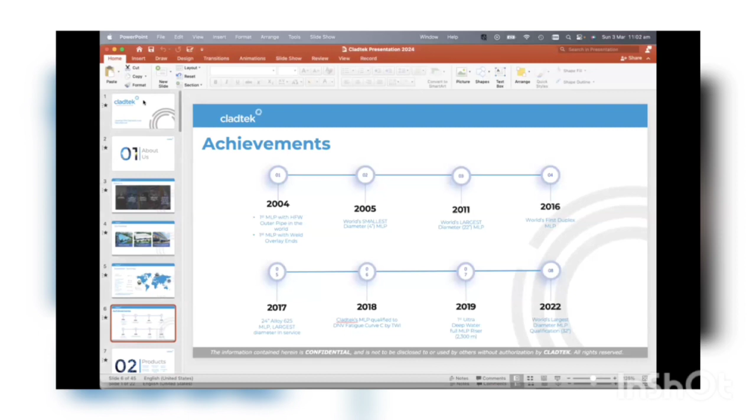Cladtek was founded in 2003. In fact, we've just had our 20th anniversary, so that's an important milestone for us. We were founded in Australia, as some of you can probably tell from my accent. I'm Australian, and our goal was to become a leader in mechanically lined pipes, so corrosion-resistant alloy pipelines, and overlaid products and all the complementary products that go around the pipeline: plets, plems, slug catchers, pig launchers, etc. All of those components that need to be in CRA.

We have 3 manufacturing facilities at the moment. Our original one in Batam, Indonesia, which produces MLP, bends, overlay and the like. Similar capability in Brazil, but the Brazil facility is more targeted at ultra deep water risers and flow lines, dynamic risers, lazy wave risers, and in Dammam, Saudi Arabia, which again is tailored to that local market. And we're in the process of establishing a facility in Doha, Qatar.

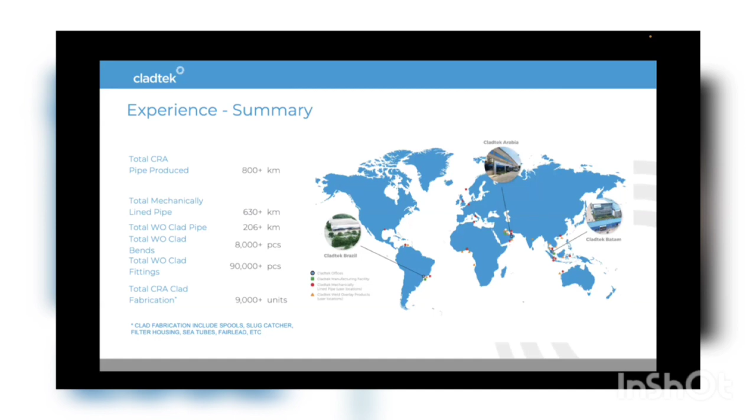Anyway, enough of the infomercial about Cladtek. So I will now jump to connected pipes.

This presentation, as I said, just gives an overview of the experiences with connectors and where the industry is at the moment, and a little bit about why there's renewed interest in connectors. So first of all, what are connectors and what is this presentation going to focus on? I think many of the people joining this webinar will be experienced with pipeline connectors.

There's all kinds of connectors. There's bolted connectors like a simple flange, Grayloc style connectors, and there's also push-fit or MIF connectors, which is another non-reversible way of connecting pipelines together, a kind of cold welding technology. This presentation is going to focus on connectors that are reversible, not the push-fit style, and connectors that don't rely on bolting.

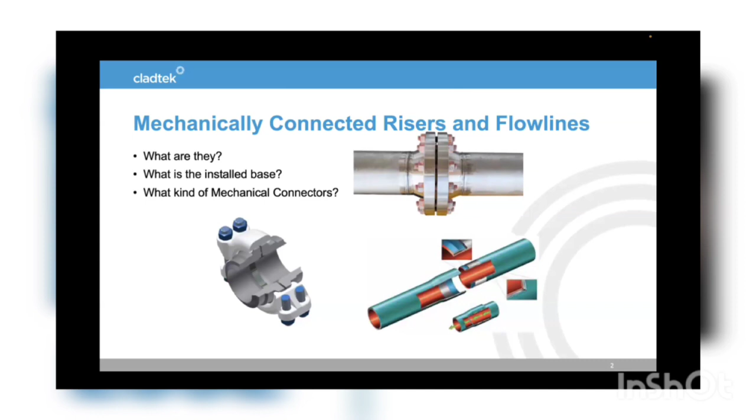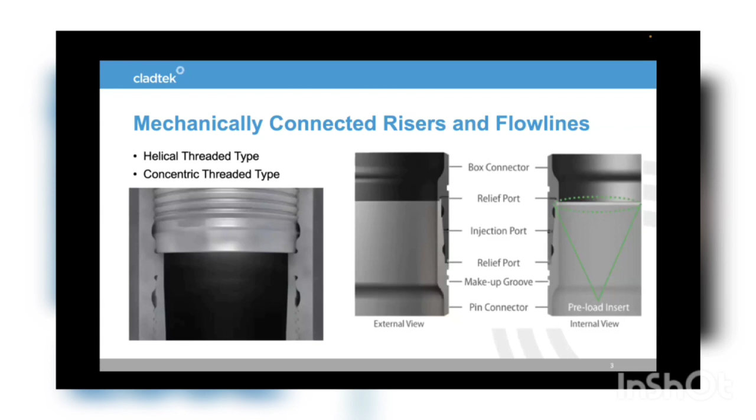The various types of connectors that exist: there's the helical thread type or the snap-together connectors like Merlin or the GMC connector. There's concentric thread type. There's helical thread types like you find in OCTG, and these can be adapted for risers and flowline use and have in fact been successfully used.

Why is there interest in mechanical connectors? Why is there renewed interest? We see there's a lot of interest in increasing use of CRA materials, and that is making the installation more challenging, with more technical requirements on the barge. So the idea of using connectors removes that complexity from the barge and takes it back to a workshop.

In ultra deep water, people have become comfortable with the use of flexible pipes, but in ultra deep water, flexible pipes are proving challenging—water depths beyond 2,000 meters and in larger diameters. But if your mindset is around flexible pipes, adapting back to a rigid solution is quite challenging in terms of the engineering and work required to install a rigid riser and flow line versus flexible.

Using connectors makes rigid pipe more like flexibles in terms of deployment. In other words, they're pre-engineered solutions, plug and play.

Another area of interest in deeper waters is higher strength materials—materials that are either difficult to weld, not possible to weld, or require post-weld heat treatment. Again, using connectors pushes this activity back into a workshop environment rather than on a vessel.

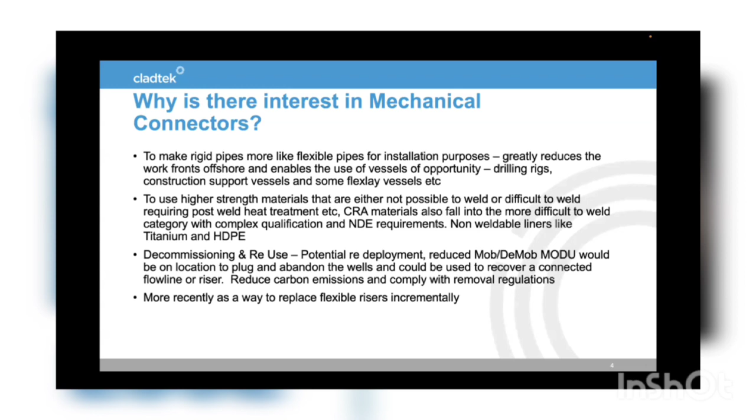So what are the concerns with connectors? Well, the main concern is failure, or the light bulbs in series argument—that if one connector fails, then the whole integrity of the pipeline or riser is brought into question. That's of course a valid concern, but there's a lot of data on connectors, and there's a lot of data to support that connectors are extremely reliable and up there with welding, if not better than welding in terms of reliability.

The other challenge is that connectors are generally not supported by the major EPCI companies, because they're welding people. They're not that much interested in developing and promoting a technology that makes every drilling rig and every construction support vessel something that can compete with their sophisticated deep water J-lay and reeling ships and the like.

And connectors tend to be proprietary, and that often interferes with the contracting models of various, particularly state-owned enterprises or state-linked enterprises like the likes of Petrobras, who find dealing with proprietary items as kind of a last resort solution. The other challenge is complex and lengthy qualification requirements.

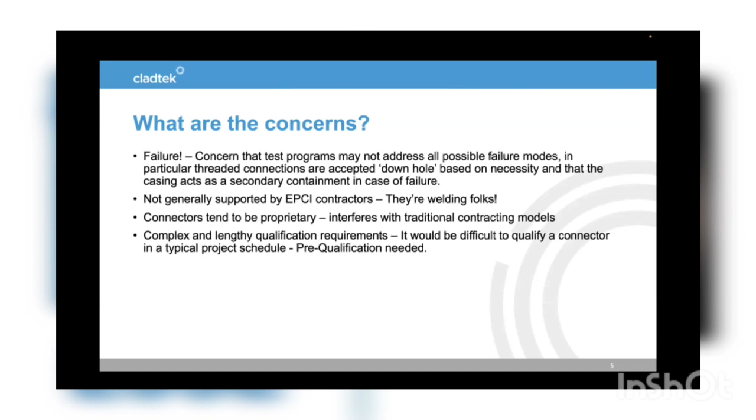Now, that of course means you've got to start the process, but the main benefit of connectors is you can pre-engineer and pre-qualify them for a range of service. So yes, it takes a while to get them qualified in the beginning, but once they are qualified, then it's a plug and play and a copy paste kind of engineering approach.

To be used in oil and gas services, what kind of characteristics do connectors need? Typically, we're looking for high pressure capacity and high reliability, resistance to leaking, able to cope with large bending loads—so that's the loads during installation, lateral buckling—and in the case of risers, a high fatigue capacity, internal and external corrosion resistance.

The internal resistance means the connector needs to be protected from the well fluids coming through the pipeline or riser, and externally, seawater ingress into the threaded areas or areas that mechanically lock together is also important for integrity. So they need internal and external corrosion resistance, and that's mainly achieved by coatings, water resistant seals—environmental seals—and anodes.

The easiest way to make people comfortable with connectors is to make sure the connector is stronger than the associated pipe in all load cases. So as long as you're sure the connector is stronger than the pipe, then the pipe is your limiting factor, and that's what you can go about designing.

The issue with that is stress intensification. The connector can be large and quite stiff, and that can create some intensification factors on the adjacent pipe, but that's not black magic—it's easily an engineering analysis that can be carried out.

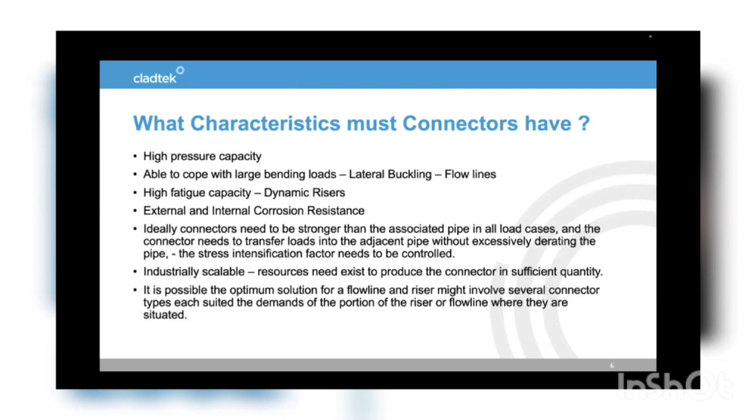It's not necessarily that connectors will be one size fits all, but of course the fewer connectors you have to qualify, the better. We think the rapid pipe connector is one that can handle pretty much every application required for flow lines and pipes, at least up to about 20 inches.

So looking at what kinds of connectors have been developed and deployed, the first one I could find that was specifically developed for flow lines or risers is the FMC differential thread connector.

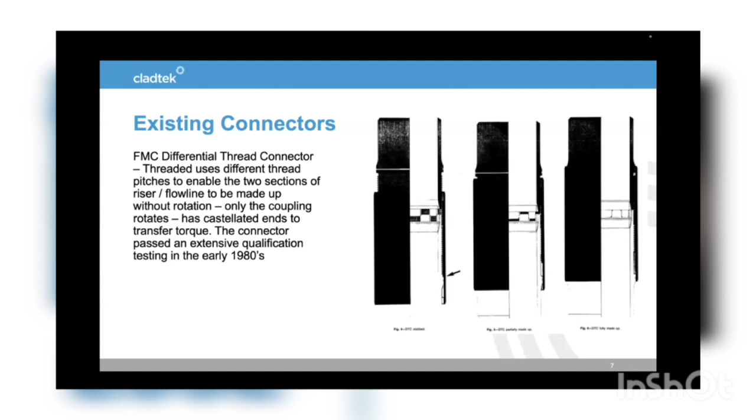This connector works by having two different thread pitches, so as the coupling is made up or the connector screws together, it pulls together one side quicker than the other. As you rotate the coupling, progressing from left to right in that schematic from the early 80s, you can see the castellations come together and the connector locks up. This connector was used by FMC, but they don't promote it anymore.

Then Hydril had a connector called the Series 2000, which has been deployed and is still in service on the Magnolia TLP in the export risers. I'd say this is an improvement or adaptation of the FMC connector.

Instead of using a differential thread, it uses a left and right hand thread, so the coupling rotates rather than the pipe. You can hold the pipe either in tensioners or slips, and then make up simply by turning the coupling rather than having to spin the pipe, and that brings it together.

In this area, you have some castellations - shapes machined into the end of each pipe. The idea of these features is that when the connector is locked together, external torque cannot undo the connection. So if the pipe were to upheaval buckle and lay over on the sea floor, that torque would not be able to undo this connector. That's obviously a concern people have with connectors.

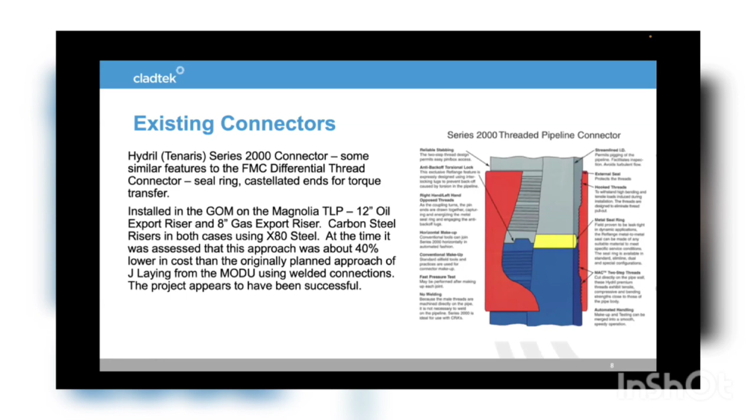Also among existing connectors is the Merlin, or GMC connector, which is a snap-together type connector. It works by having concentric rings that look like threads but don't actually screw together. It pushes together with hydraulic pressure injected into injection ports, which creates an elastic deformation of the pin and box, and then it's pushed together and those things snap back into place.

This connector was originally developed for structural applications, to connect together the legs of TLP platforms - the tendons for tension leg platforms. These days it is being adapted for fluid transport as well, and it has established a market in replacement risers, such as seawater risers on old platforms.

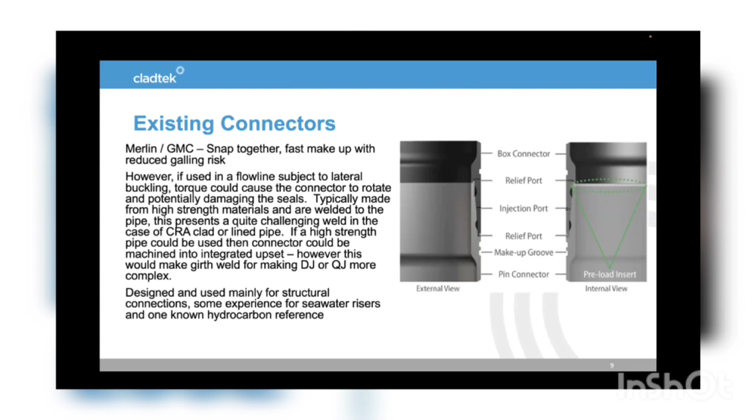The attraction of using this kind of connector in that application is that there is no hot work on the platform when it's replaced. Now this connector is being promoted also for hydrocarbon service, and as far as I know, it has one installed reference in that service.

The other kinds of connectors you'd be quite familiar with are adaptations of OCTG style connectors. So VAM TTR, which is a threaded and coupled connector, is an adaptation of something like VAM Top or VAM HC. There are a number of other OCTG thread technology companies promoting traditional threaded type connectors also for riser and flow line use.

The concern with these kinds of connectors is the possibility of them unscrewing under external torque, and that they're not really optimized for the purposes of flow lines or risers. They are as they seem - an adaptation of something designed for downhole use.

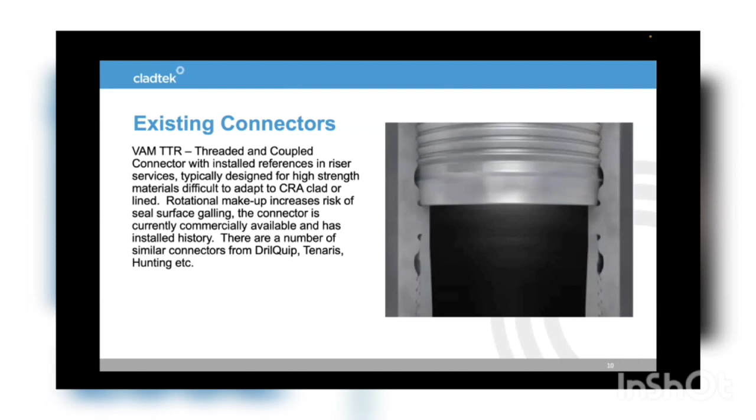So our connector, which we will go into more detail on, is the rapid pipe connector. The best way to think about it is as a BX flange or BX swivel flange, where we have removed the hub and bolt section and replaced it with a tensioned collar. But the sealing arrangement and sealing technology is the same as a BX flange. The makeup system, which we will show in more detail in the following presentation, is a tool that grabs the pipe and connector, pre-tensions that collar, and then you screw in the toothed ferrule.

The pre-tensioning technique is something similar to how you would do a Hydratight bolt tensioning activity. That's where you stretch the stud bolt and the nuts are turned without load, and then you release the stretch on the bolt and everything is made up. This works the same way: the collar is preloaded and the toothed ferrule is driven into place without load and locked up, then the hydraulic tool lets go of the collar, and we have a device that measures the residual tension in the collar.

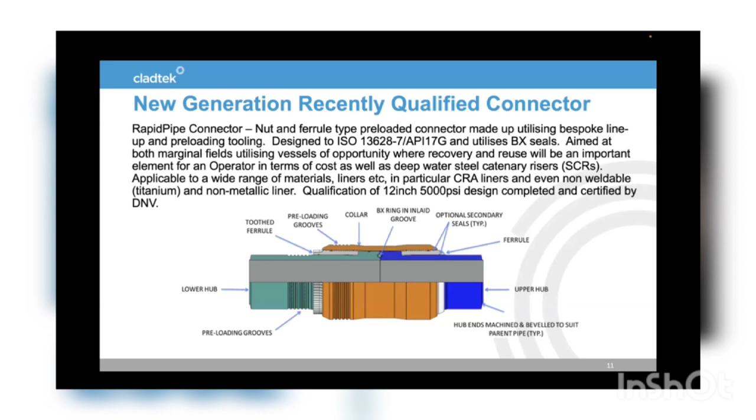So if we compare the different connectors here, and we can share this presentation after. So it seemed to have a bit of background noise there. Apologies.

This matrix compares the various different connectors, and we have tried to address the various limitations of the existing connectors. The differential thread is really not supported anymore. The Series 2000, as far as we know, Tenaris is not making it. So the ones being promoted in the market these days are the Merlin GMC, the various threaded connectors, and Rapid Pipe. We think that Rapid Pipe addresses most of the issues that you find with the other kind of connectors.

One of the big challenges of the snap together connector is they're made of very high strength material. So you replace one complicated weld with two welds that are more complicated. The sealing area is part of the structural integrity of the connector, which is also a challenge. Rapid Pipe overcomes most of these.

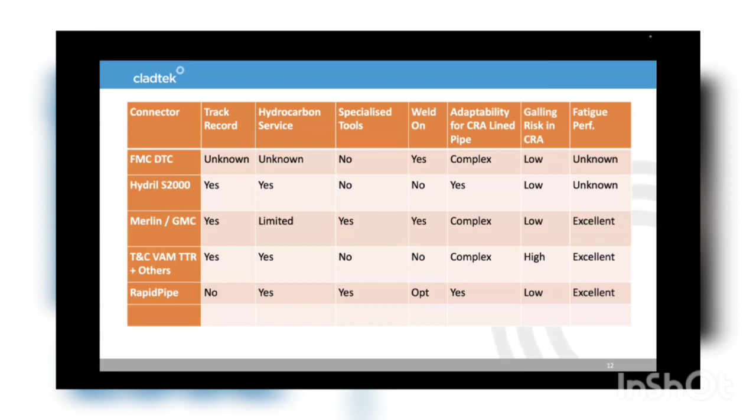In terms of developing what the industry needs to adapt these connectors for use with non-weldable liners, we think CRA liners is very important, and that work is ongoing at the moment. More engineering analysis is needed, and a suite of software tools to define how to install connected pipes, what vessels to use, and the parameters for different vessels.

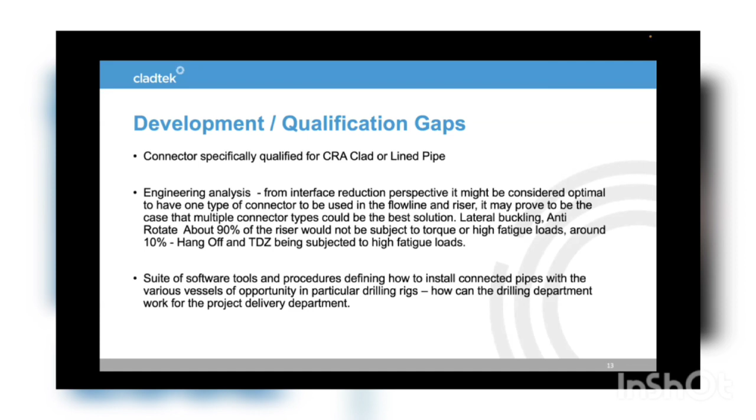With a drilling rig, on an older rig you would be able to do a double joint. On a more modern rig, maybe a triple joint. On construction support vessels, quad joints are possible, or if you're going to install using a conventional J-lay or S-lay vessel, in most cases quad joints should be possible. So all of this needs to be developed and worked out.

If we look back, there's been lots and lots of presentations on connected pipes, and I'd say there's been more studies than there has been risers installed, but there has been quite a few connected flow lines and risers installed over the years, and for the most part they have been successful. But nonetheless, welding still remains the major technical solution for connecting pipes.

Why is that? This is a statement made 20-something years ago at a presentation: threaded couplings have been used for many years in the offshore industry, particularly in drilling applications, risers, and BOPs, and people are super comfortable with connectors in that application. But as soon as you get to the pipeline or the riser, there seems to be significant resistance.

I mentioned some of the reasons for that before, namely the industry resistance in terms of it being against the industry's vested interest in keeping people welding, because all of the installation assets that the main EPCs have are geared around welding. And the industry has relatively high confidence in welded connections, and the availability of traditional installation vessels all work around welding.

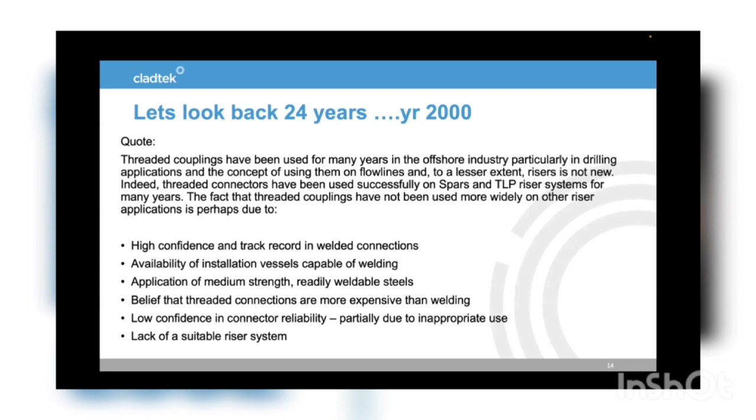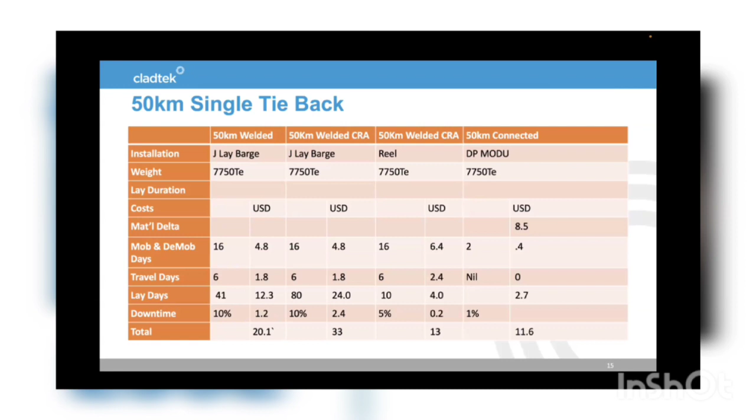If we compare to a shorter tieback, the difference is really quite stark, using a drilling rig for the installation because the rig is already on site. So your mob and demob is almost nothing, just a little bit of equipment that needs to go out to the rig to facilitate the installation. And your material delta, again on a short tieback, is relatively small. But you can see the cost is roughly 75% less than mobilizing and doing it using any of the conventional techniques.

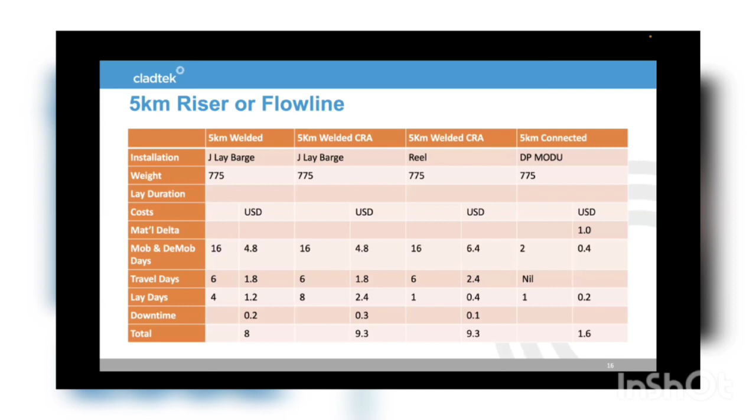So this is just to say where the industry is up to at the moment. Connectors for pipelines do exist. They are qualified and already in limited use. There's still further development needed to address specific sectors of the market, CRA in particular, and other non-weldable liners. But we are seeing increasing interest from operators, particularly those in ultra deep water, to look at connected solutions.

Petrobras is one that is running, looking very closely at a connected solution. We know other super majors that are looking at conceptual development for 4,000 meter water depth, because the deepest water depth drilled now is, I think, just over 3,600 meters.

And of course, if you find something there, you need to figure out how to produce it. These operators that are drilling at these depths have engaged in studies looking at how they would go about developing discoveries in water depths up to 4,000 meters. And those conceptual ideas all consider a connected solution which enables the use of high strength materials.

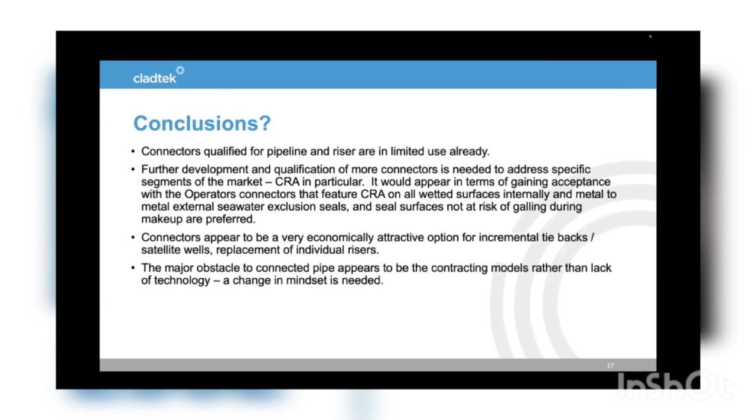Connectors appear to be a very economic, attractive option for tiebacks, and very attractive where CRA materials are involved. The major obstacle I can see is mainly inertia, the contracting models. It's not a lack of technology, it's contractual inertia and a mindset.

Looking towards the future, why is it different now, and why after 20 years, if there's only been such limited adoption, do we think there will be more acceptance and more drive to using connected solutions?

One reason is an explosion in demand for CRA pipes, driven by ultra deep water, high temperature, high pressure discoveries, and also by re-injecting CO2. To give Brazil as an example, in the WAG injection lines, the CO2 is going back into the wells, and that creates quite a corrosive environment. So we're seeing more and more CRA, hundreds of kilometers a year rather than 100 kilometers every few years.

And we know that the welding productivity of CRA is quite poor, which is why reeling is an attractive option. But we need other options that are attractive as well, commercial and proven. We expect in the future, as the transition to lower carbon solutions takes place, there will be more emphasis on tiebacks and using existing infrastructure as much as possible. And again, tiebacks tend to be CRA because they're blood, guts, and feathers back to the processing facilities.

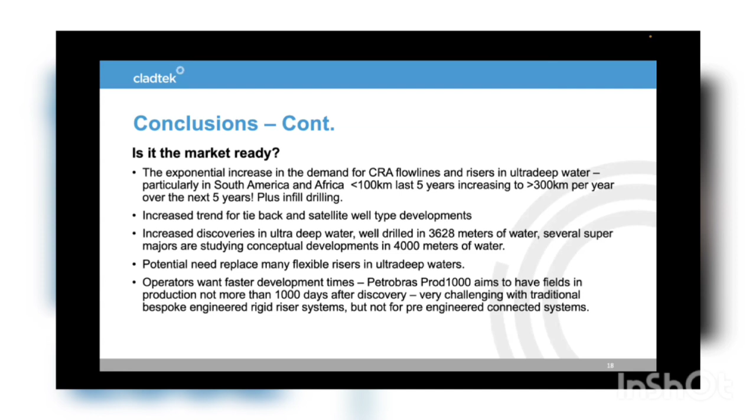All right, so that concludes the overview of the market. The next presentation I'll jump to is specifically on the RapidPipe, and my colleague Stephen will help out with this. Stephen is the inventor of this connector, and we'll go through the attributes of the RapidPipe connector and why we think this is, at least for flow line and riser applications, the best connector available.

An important point is the best way to think about this connector is a BX flange where we've removed the hub and bolts and replaced it with a tension collar. So it's using off-the-shelf, readily achievable dimensional tolerances, and cladding solutions for seal areas. All of the sealing components are a very well understood aspect of the connector, and it has been designed from the beginning to be used as a fluid transport connector, not as a structural connector being adapted to fluid.

So Marine Direct and Stephen invented the connector, and they've been working with NOV and DNV to qualify it. The applications for this connector are, as I touched on before, targeted for flow lines and risers, specifically where it can work.

It's very attractive for ultra deep water developments, but it's also attractive for what in the UK they call small pools or marginal field developments, because it enables the pipeline to be reused. That is a very important part of the circular economy as we go through more and more tiebacks, and as various jurisdictions at end of field life require all field infrastructure to be removed. If you can remove it, clean it, inspect it, and reuse it, that is much better for your CO2 footprint than burying it in landfill or deconstructing it to recycle the various components.

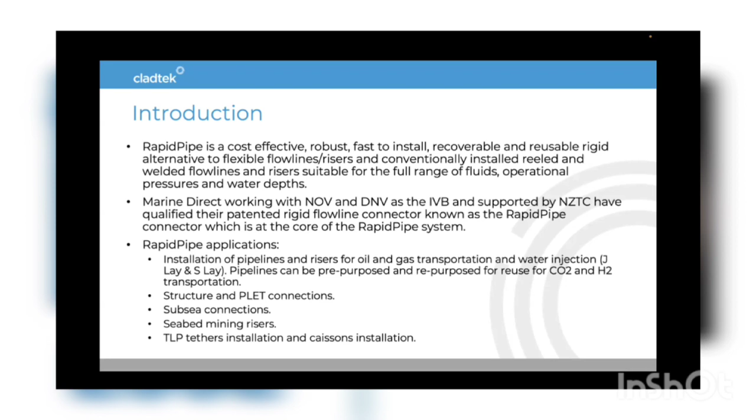Compared to reeling, in the installation modes contemplated for RapidPipe, the pipe would always stay within its elastic range. So unlike reeling, where the pipe has to tolerate high plastic deformations, that is not an issue with a consideration for RapidPipe.

We expect that quad joints or hex joints will be the most efficient way to install, but this depends on the vessel capability. There's no requirement for a spool base. This can be done in workshops or existing facilities. It does not require a dedicated spool base, and could, in certain circumstances, be assembled on a vessel.

All of the welding and hot activities take place in a workshop environment. So in the field, it's a very simple installation. When we use a vessel of opportunity, like a large construction support vessel or a drilling rig, you have...

One station for makeup and a station for field joint coating. Compare that with welding, say CRA, where you have a station for beveling, a station for root and hot pass, NDT of the root and hot pass, potential cutouts or repairs, another station for fill and cap, more NDT, more potential cutouts and repairs. That's the reason CRA is relatively low productivity.

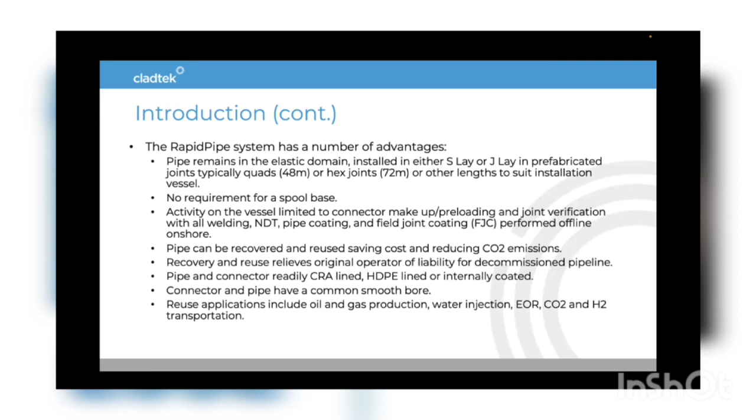It can be used with high strength materials, so welds that need stress relief can be done in the workshop environment, because it's off the critical path of being on the barge. High strength steels are much easier to use. CRA lining, non-weldable liners, internal coatings, can work with regularly coated pipe externally.

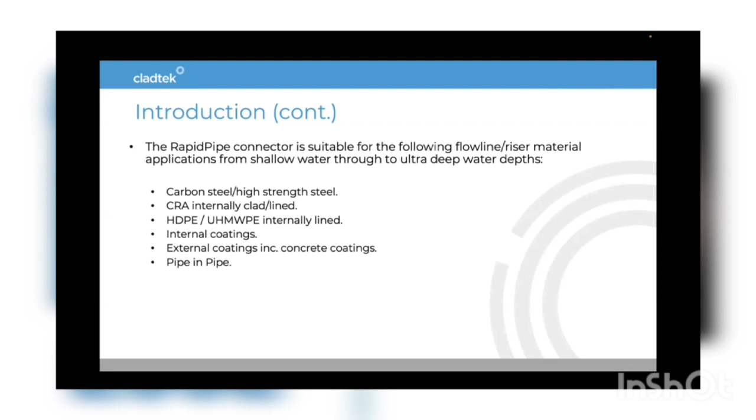Also in our concept for risers, we can have prefabricated joints of pipe with connectors on one end, pipes without connectors but anti-corrosion coated, that in a very short time we can assemble into doubles, triples, or quads. Then using a cast system we can add insulation to the outside. The system's also suitable for pipe-in-pipe type installations.

If we compare, what does reuse mean in terms of cost reductions compared to existing solutions? For risers, the installed cost is typically around 50% of the current methodology, not considering the possibility of reusing the pipe. If you do reuse the pipe, looking at a 30-kilometre, 10-inch tieback, the CO2 savings is around 5,000 tonnes per pipeline, so quite significant.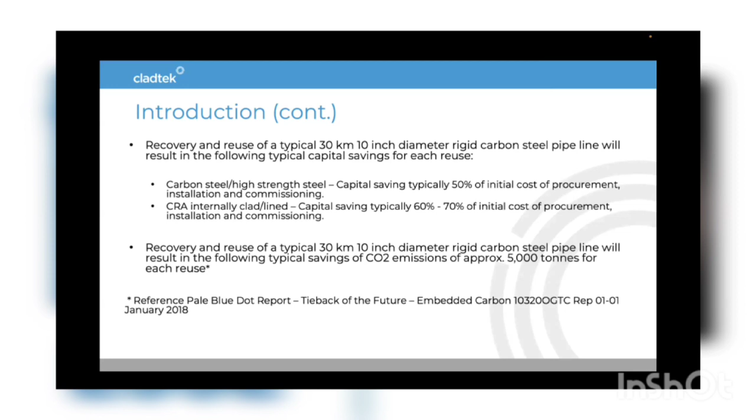Stephen, would you like to talk about the components of the connector? Yeah, can you hear me okay? Yes. Okay, good stuff, Paul, thank you for that. So with regard to the... sorry, my daughter just thought I'm going to go on to the next presentation, but we're still on the old one.

So we've got the left-hand hub here in green, which would be beveled to suit the parent pipe. That's got a series of preloading grooves. I don't know if you can see my cursor. Let's check - yep, so the left-hand hub is green, with the preloading grooves.

On the right-hand side, we have the upper hub in blue, also beveled to suit the parent pipe. We have a collar in orange, pre-fitted with the right-hand ferrule in grey. Back to the left-hand hub in green, that ferrule has a toothed arrangement to allow torquing, but low torque is applied. We'll come to the makeup process a little bit later. Then we've got the BX ring, fitted in ring grooves between the upper hub and the lower hub. But these are the principal components.

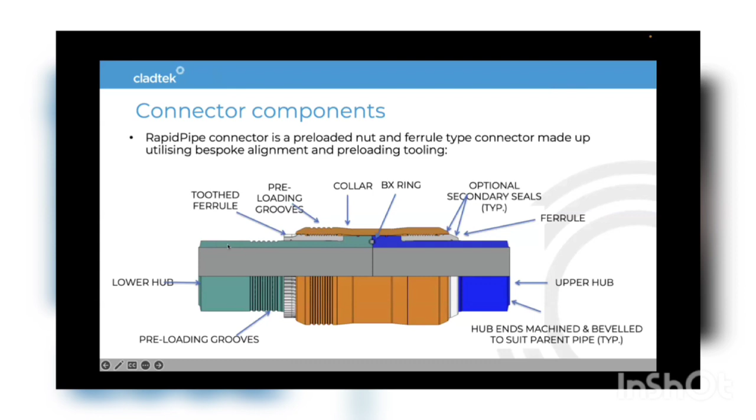So that's the main components of the connector, and we'll come to the installation and makeup process a little bit later. If I could just add, this configuration is showing a weld-on connector, but it can also be machined into an upset end pipe to avoid these welds. So that's the other option, either having it welded on or not.

Shall I carry on, or you carry on? Yes, Paul, so you should be seeing connector qualification now. Yes, I've got that, thank you.

So, working with NOV, we were sponsored by Net Zero Technology Centre, formerly the Oil and Gas Technology Centre, as part of their plug and play initiative to qualify a 12-inch 5,000 psi connector. The project included detailed design of the connector, manufacturing and testing of 3 test specimens, culminating in the issue of the technology certificate by DNV. We managed the project, which commenced in May 2019 and completed in September 2022. It took a little longer than planned because of COVID, but NOV did a fantastic job with the detailed design and qualification.

So of course we didn't only do a static analysis, we did a fatigue analysis, we did static testing and fatigue testing. And all the tests worked out very well indeed.

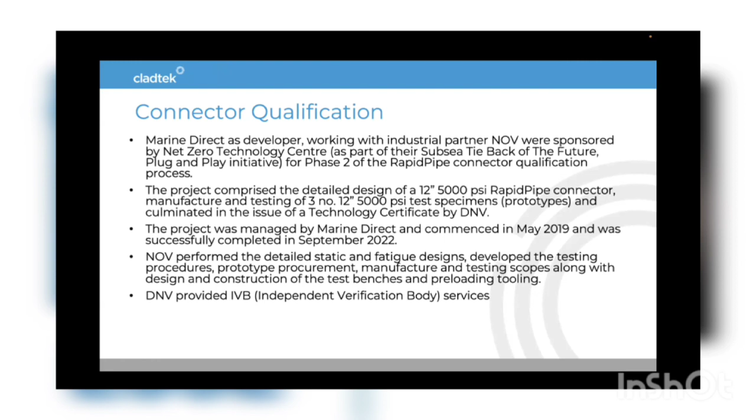So the principal design codes - we designed the connector in accordance with ISO 13628-7, which is equivalent to API 17G, also taking account of DNV RP-F101 for pipelines and DNV RP-F201 for risers. It's a 12-inch connector, designed to suit API 5L X65 pipe of 20.6 mil wall thickness, pressure rating 345 bar or 5,000 psi, with a max operating temperature of 121 degrees, max water depth of 2,000 meters. But it can go way beyond that depth.

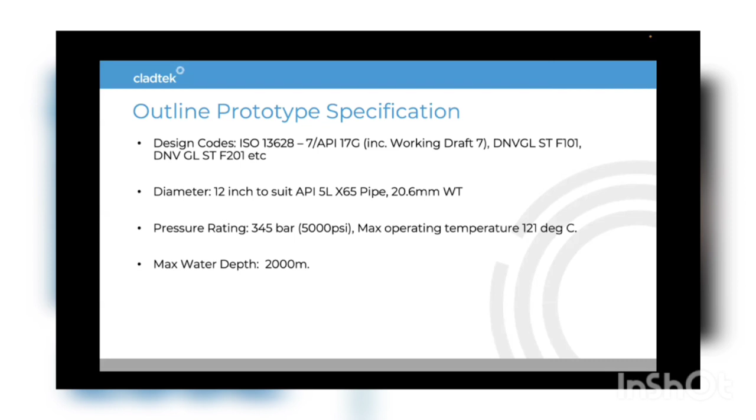Designed to be stronger than the pipe in bending, tension, and internal pressure. We also designed it to be stronger in fatigue than a Class D weld. During the fatigue testing, we saw no signs of damage after disassembly.

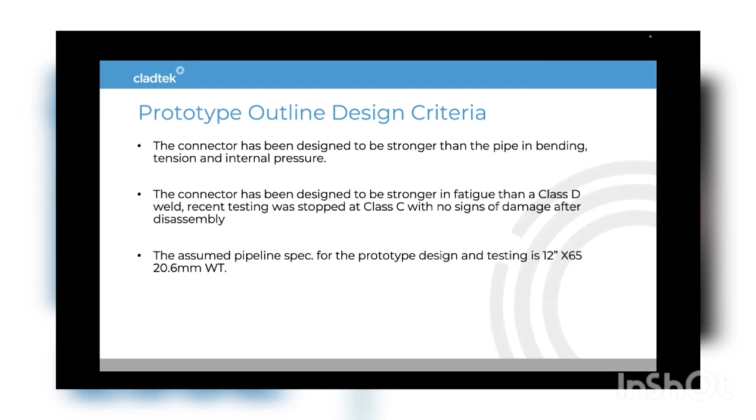So this is some typical FEA, finite element analysis outputs. You can see the relative stress - I'm not exactly sure which load cases these are - but it's quite interesting to see how the stress distribution looks. The lower one you can see is in bending.

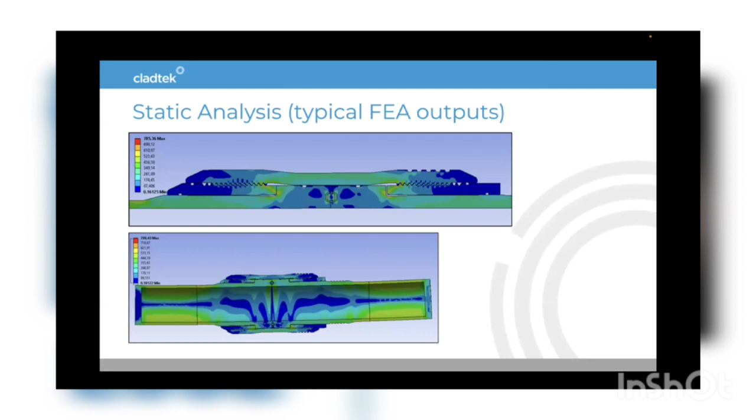So the connector materials - the hubs are made from forging material, ASTM A707 L5 grade 3, with the ring grooves inlaid with Inconel 625. If necessary, the Inconel can be extended into the hubs for CRA applications, and the CRA would then match up with a CRA liner, which would be slid from the pipe into the hubs and completed with an internal weld. The collars and ferrules are manufactured from a much higher hardness material, but of course they're not welded, so that's of no concern.

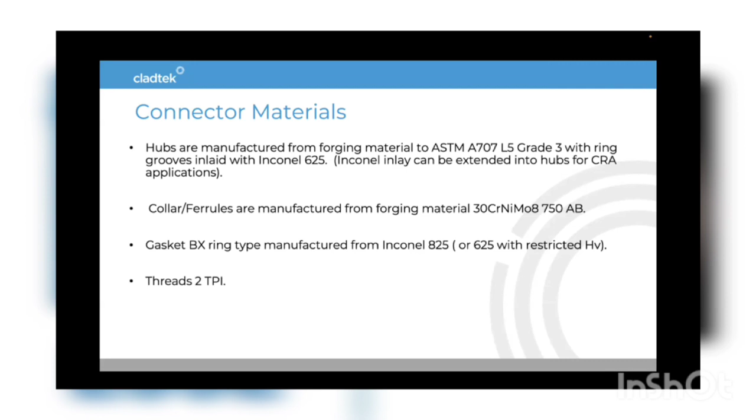The spec of material is 30CrNiMo8 - I'm not sure what it's called, but that's the spec. The BX ring is manufactured from Inconel 825. And the threads - quite big threads - they're 2 threads per inch.

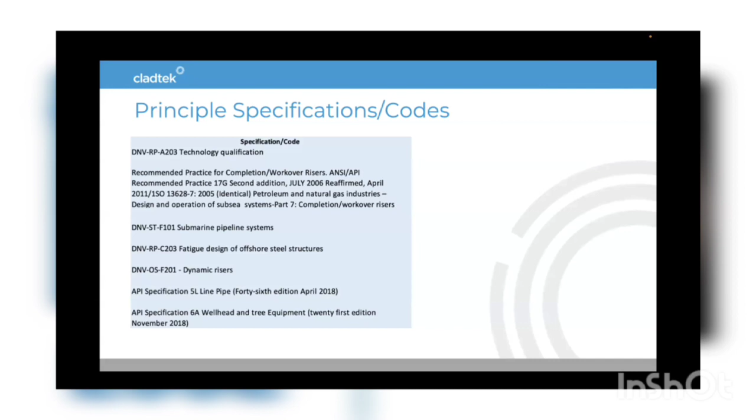So we generated quite a number of documents which were reviewed and approved by DNV. We had quite a number of comments - you see we've got the TQRs listed there, that was the to and fro with DNV.

This is a photograph of the connector fully made up, with the preload already in the connector. During the makeup process we would apply about 2,000 tons, and once the connector's made up we're left with a residual load of approximately 1,500 tons. That additional ring you can see on the left-hand end of the collar is part of the installation device - a completed connector does not have that in place. It's a nice photograph showing a very shiny connector before it gets subjected to heat treat, temperature and pressure fluctuation activities.

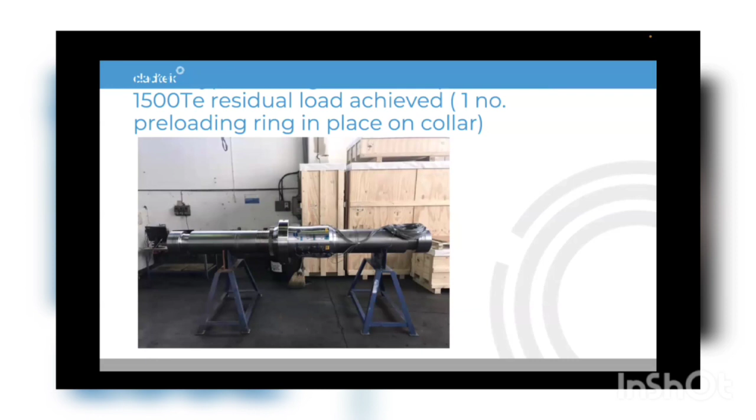So sample one - a whole range of tests here which we won't go through in detail, as mentioned we can share this presentation with you later on. A whole range of pressure and temperature testing - temperature was on the second one later. On this one we used this device on the right-hand side below to do the tension loading, and we also used the same device to do the low cycle, high stress fatigue loading.

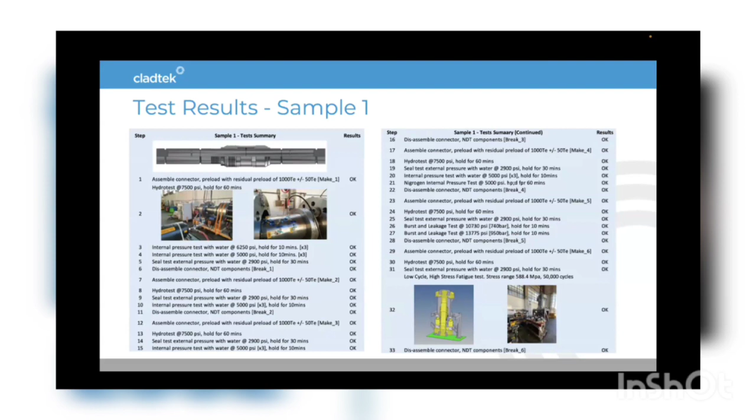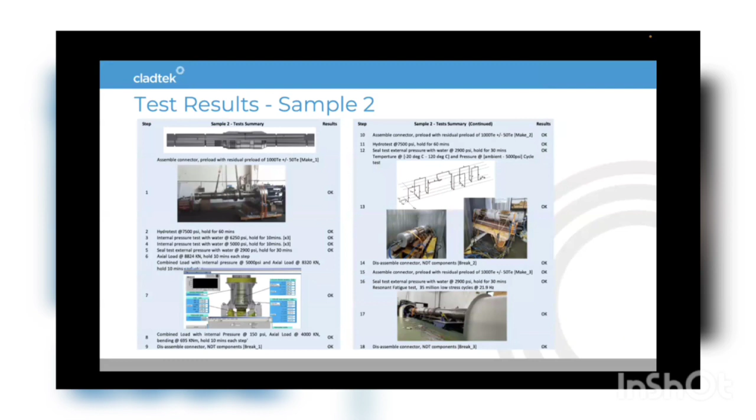This is sample two, with more internal pressure testing. Sample two was subject to the API 6A testing on temperature and pressure fluctuation, as you can see from the pictures on the right-hand side. Sample two was also subjected to the high cycle low stress fatigue testing at DNV Singapore. So all the testing was done at NOV Remacut, with the exception of the high cycle low stress fatigue testing, which was done at DNV Singapore.

This is the completion of the temperature and pressure fluctuation testing. You can see there's a bit of discoloration there caused by the high temperature during the temperature testing.

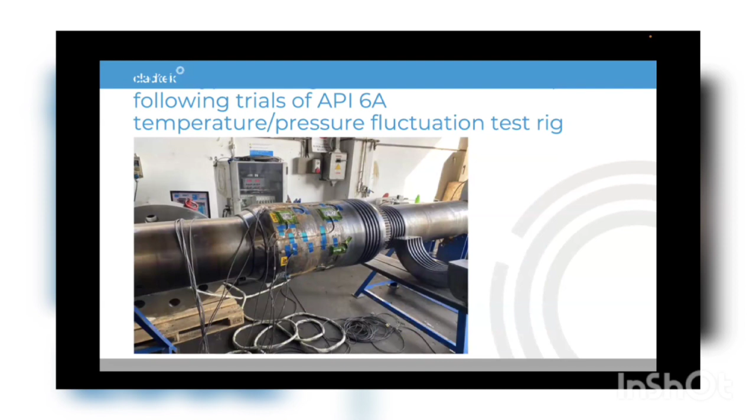So this last specimen was put onto the bending rig, 4-point bending, and subjected to combined tension and bending. This sample was also sent to DNV in Singapore for further high cycle low stress testing.

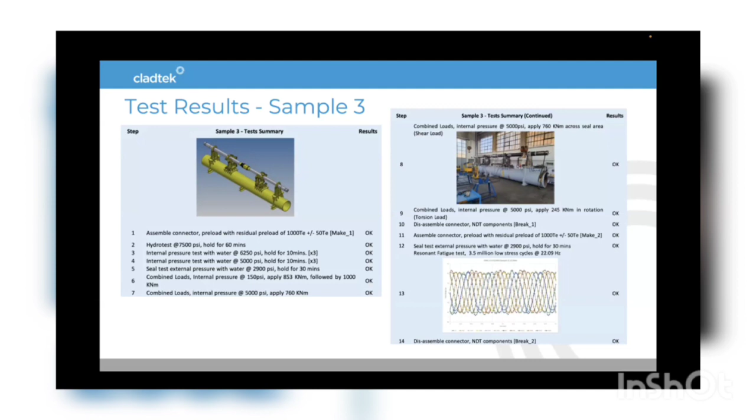So next one, please. This all culminated in the issue of a statement of qualified technology by DNV, and we were pleased to achieve that. Relatively straightforward process, I have to say, and DNV did an excellent job.

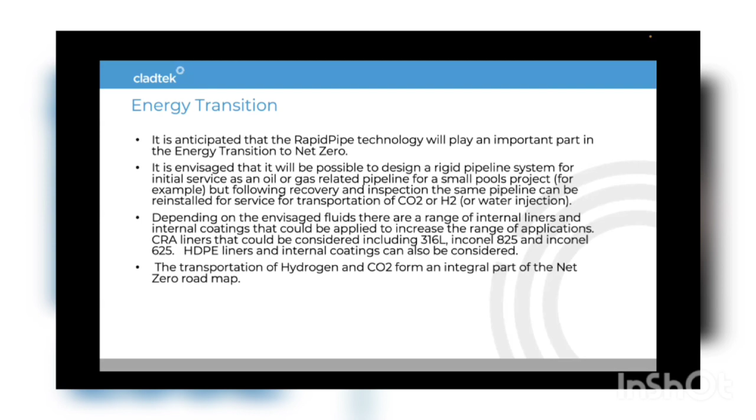Thanks very much for that, Stephen. So as everyone can see, we're well on the way with having received the type approval, or qualified certificate of technology, from DNV. And as I said, the main target of Cladtek for deploying this connector is we believe it's essential to reduce the installed cost of CRA flow lines and risers. This particular technology is extremely compatible and beneficial to that goal.

Some of the specific benefits we get from using this connector: the triple point, which is the area of great concern typically with a lined pipe and where all the interest in fatigue properties is focused. One of the benefits of the connector is we can have that triple point located well up inside the connector where it's thicker and more stable. So we think using this connector will not only give the connector itself a very high fatigue rating, but it will enhance the fatigue rating of the MLP as well.

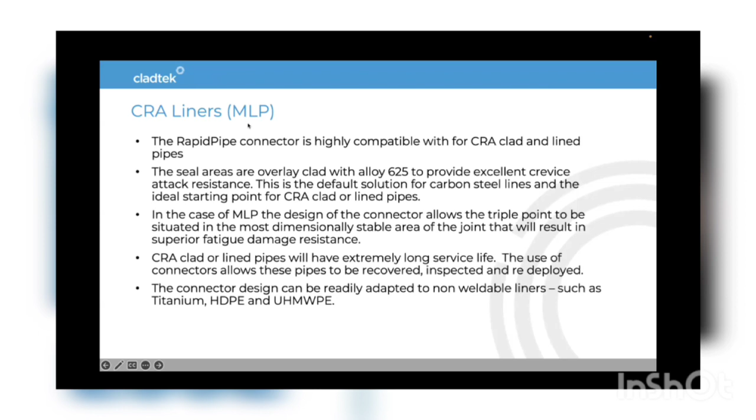The other benefit we get with connectors, and that we see as part of this ecosystem around connected flow lines and risers - I touched on this before - is the drive to reduce the time from discovery to development. That's one area where flexibles are strong, because you have your flexible pipe sitting there with connectors on either end - it's like plugging in the garden hose almost. We need to get rigid pipe to that sort of ease of use, a plug and play solution. And you not only have to worry about pressure containment, but also insulation, and in deep waters and areas with high current, you also need to worry about VIV and drag.

We've identified a castable insulation system called GDLX from a company called Bayou. This particular product is an Exxon product, but the main advantage we see for the connected solution with this product is it's castable, so it can be put on after.

Our concept is we have pipes with liners and connectors, pipes with just liners that are anti-corrosion coated. Those can be sitting in inventory, and when a requirement for the pipe is needed in the field, we're in competition with the flexible solution, where the flexible is sitting on a reel ready to be deployed, and we need to be as close to that as possible. We can then assemble those components that are already corrosion coated and lined into doubles, triples, or quads needed by the installation vessel.

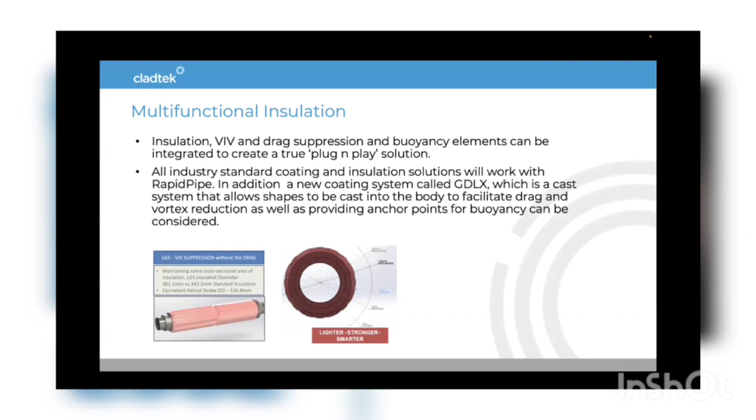If you can reduce your drag, you can put the risers closer together, because in a floating system with lots of risers, you don't want the risers banging together. So they need to be separated by a certain amount, and how much they're pulled around by drag is really important. If you can reduce the drag, you can put your risers closer together, which also reduces the overall loads on the system.

And that brings us up to question time.

Did you want to do something on insulation, Paul? Yes, sorry. Was that in? No, I've got it. You've got it? Okay, if they have a question, they can either try to speak up or write in the chat box.

Okay, we're just going to show one video showing the installation. So you're going to do that, Stephen, or do you want me to do that? I'll stop sharing. Right, I'm starting sharing now. What do I do? Am I sharing this now? Yep, we're seeing your screen. Okay, good. Click on slideshow from the beginning.

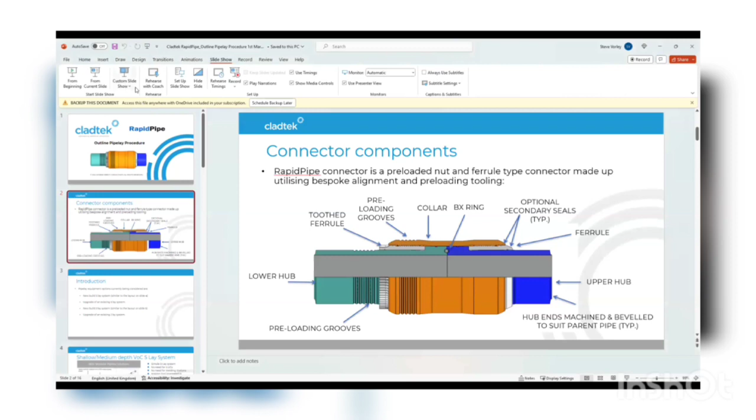So that was a reminder of the connector configuration. In terms of installation kits, there are various options. We're considering possibly a new build S-lay system, an upgrade to an existing S-lay system, a new build J-lay system, or an upgrade to an existing J-lay system. It depends what's available, who's interested in working with us, etc.

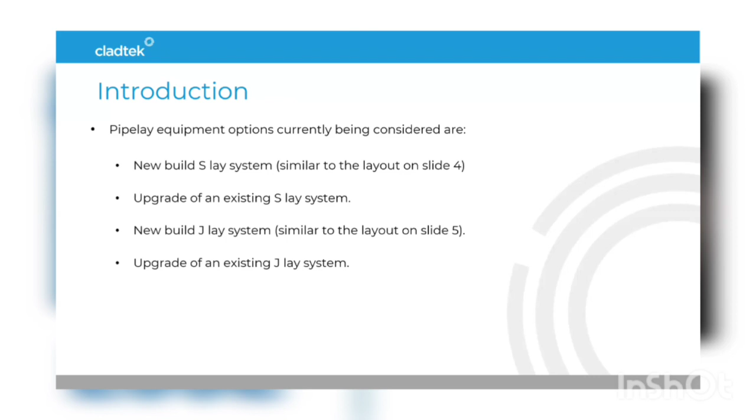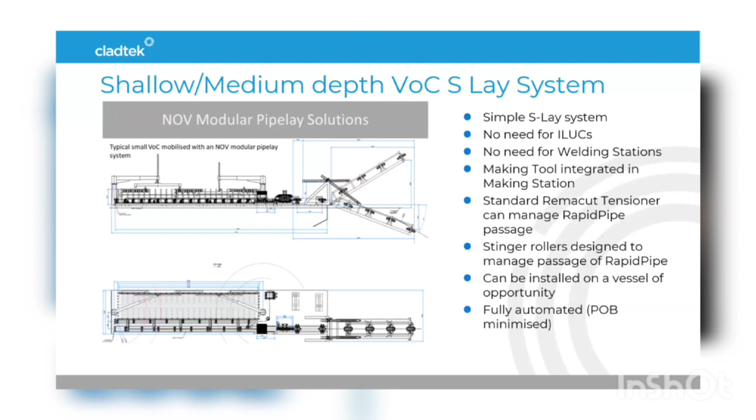This is an envisaged new build S-lay system, more for shallow water applications. As you can see with the configuration, there's no need for the internal line-up clamps, no need for welding stations. The makeup tool can be integrated into the overall makeup station. We can use the standard tensioner from Remacut, part of NOV, that can take the made-up connector. The stinger rollers can be designed to suit the passage of a RapidPipe connector. It can be installed on a vessel of opportunity, and fully automated, significantly reducing the number of people on board.

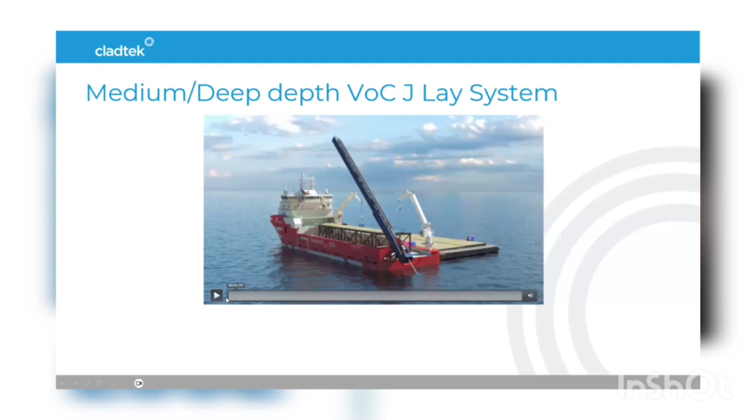This is an envisaged J-lay system, and there's a little video attached to this. I'll just run it now.

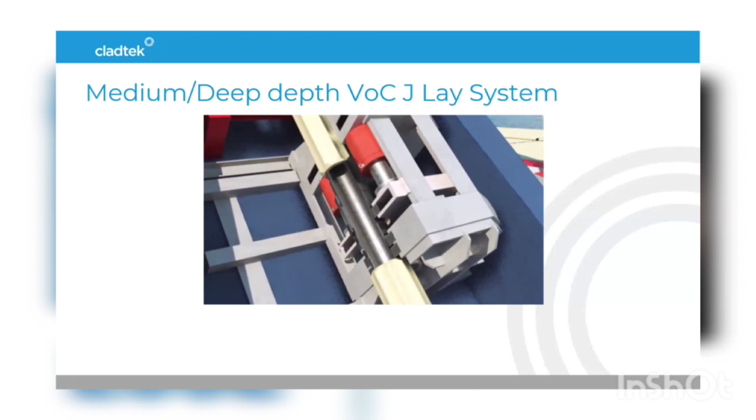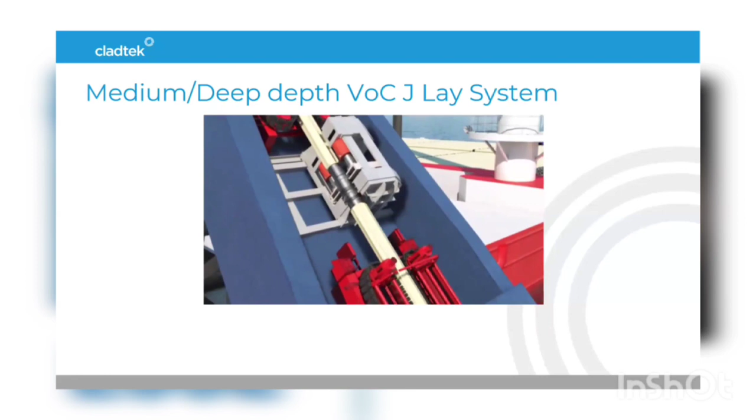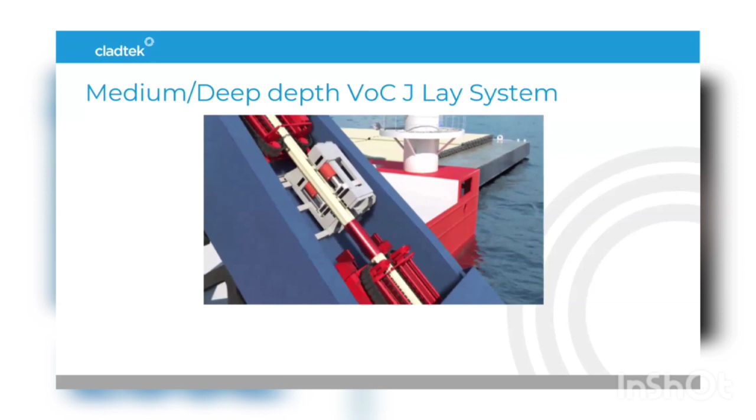You can see the preloading going on, the collar translation, the preloading, and then the wind up of the ferrule, and then it passes through to a station where we can coat the connector with whatever type of coating is required. Normally it would be a shrink wrap type of coating.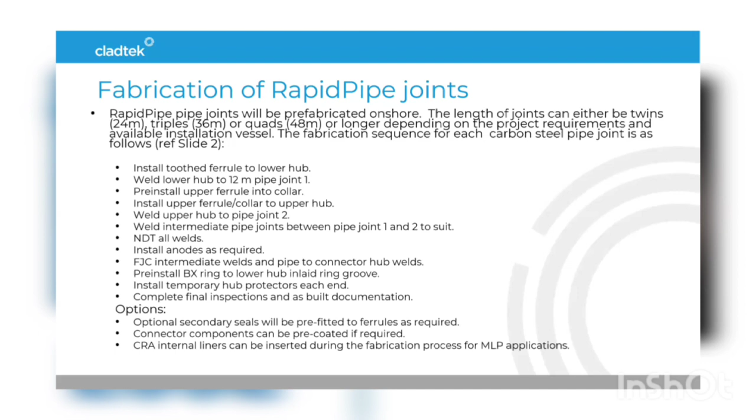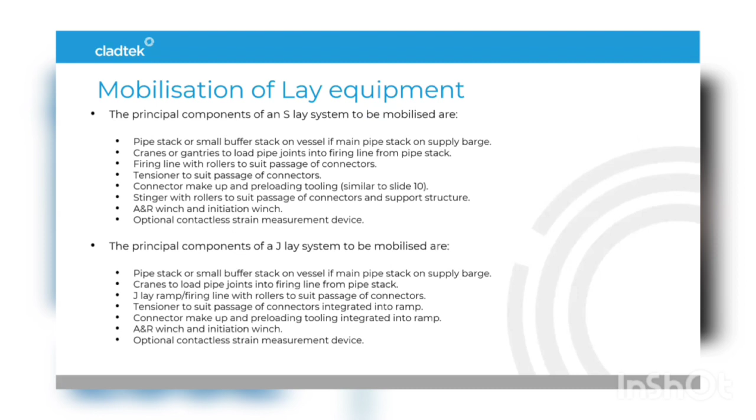This is running through the mobilization of the equipment, either in S-lay or J-lay. We won't go into too much detail there, but we've given you an overview of a typical S-lay setup or a J-lay setup. We also run through the typical pipe lay procedure. Once we send you the presentation, that can be read through in more detail, but it's very similar to what is carried out with welded pipelines or risers.

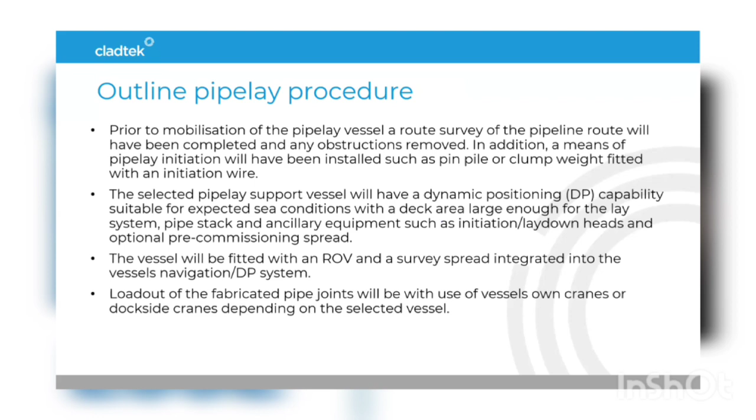That is a continuation of the procedure. This is how a typical connector makeup device would look on board an S-lay vessel or a J-lay vessel. I'll put the laser on here.

This is the collar, and on the right hand side here you can see the grooves in the lower hub where the preloading is applied, and the grooves on the right hand side of the collar, and the rams that would be preloading that collar. This right hand ferrule in red here would have the cog arrangement, and there would be a cog type setup in this part of the device to apply a low torque to that ferrule.

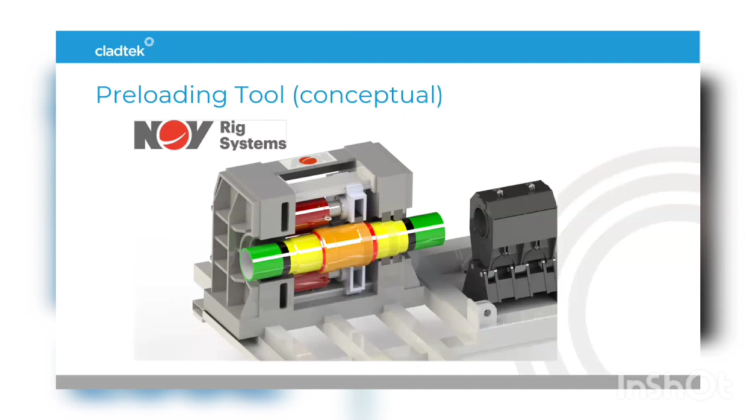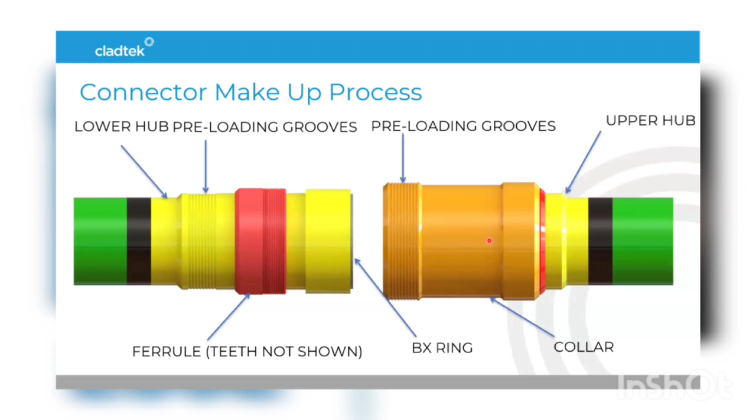Moving on, this is the process with a bit more detail. The collar is pulled back. You've got a pre-installed ring here, a BX ring. You've got the ferrule on the left-hand side, the collar, and a pre-installed ferrule on the right-hand side. You bring the two hub faces together like that.

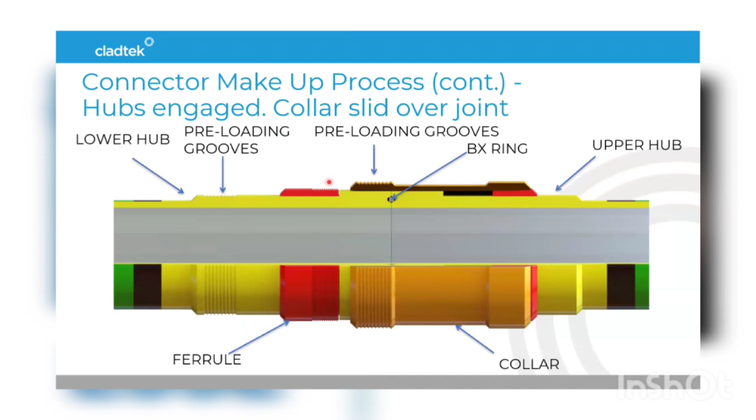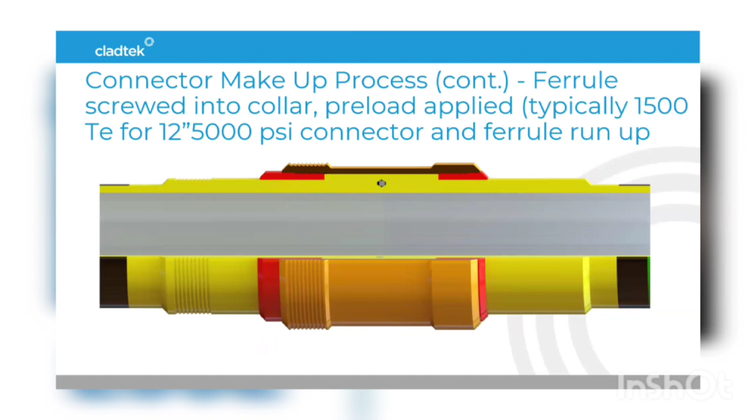Then the collar is slid over, and the preloading tool, which is not shown here, engages with the preloading grooves on the lower hub and the preloading grooves on the collar. The left-hand ferrule is screwed into the collar, then the tooling's removed, and on a 12-inch, 5,000 psi connector, you've got typically 1,500 tons of residual load locked into that collar. For joint integrity, this is of course very important.

There's a number of things we would monitor. There's the manufacturing, which has to be carefully controlled, protection measures during loadout and installation, close visual monitoring during makeup, pre-calibration of the preloading device, and monitoring and measurement during makeup of hydraulic pressure, load displacement, and residual strain in the collar.

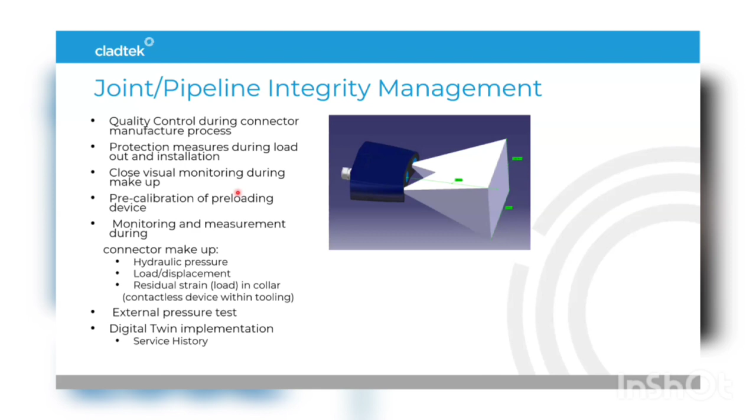We envisage a contactless strain measurement device that will measure precisely how much residual strain there is in the collar following makeup. If you know the residual strain, you know the residual load in the connector. Because we have the potential for reuse, we see matching up with digital twin technology to be particularly applicable to this technology.

Outline procedure continued. Again, I won't go into detail here because we're very tight on time now. And that's the end of this part of the presentation.

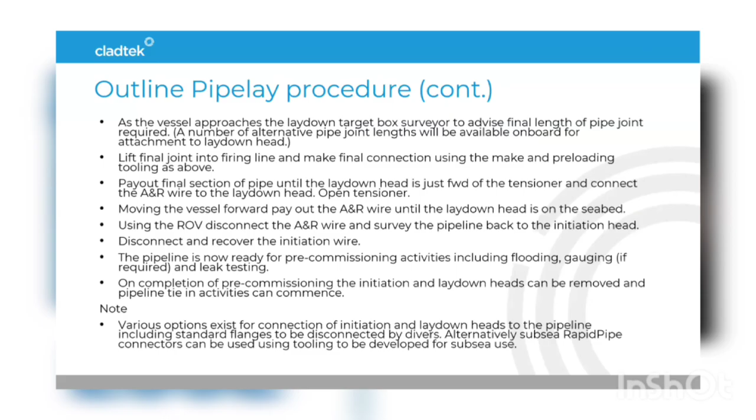So, are there any questions from anybody? Okay, maybe our audience, if they have a question, they can either try to speak up or write in the chat box. We have a question from Shema. Okay, Mr. Bull, Mr. Steven. We have a question in the chat box. I'm not able to see the chat box. Where do we open? Is that in notes or? Shema says, did you perform any sour testing on the material?

It's designed in accordance with the NACE requirements for general oil and gas applications, but we haven't designed it for exceptional sour service in terms of the testing we did for samples 1, 2, and 3. So if we were going for absolute sour service, we would need to do some additional testing. But a lot of it comes into the material selection. I would imagine for sour service, Paul, you could comment more. Yeah, it's more of a material selection question, and we can make the components sour service capable. Our main target here is CRA materials, so from an internal point of view, the carbon steel components are protected by the CRA layer.